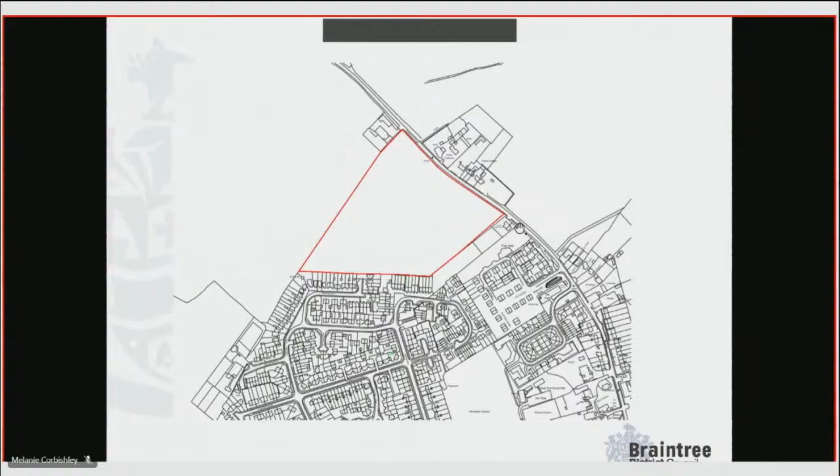The top end of the site, where you're driving out of the village. You can see in the background the properties and existing roads in Silver End, and then this is the edge of the site. You can just make out the Harris fencing, and this is the construction work that has started on site for the temporary access.

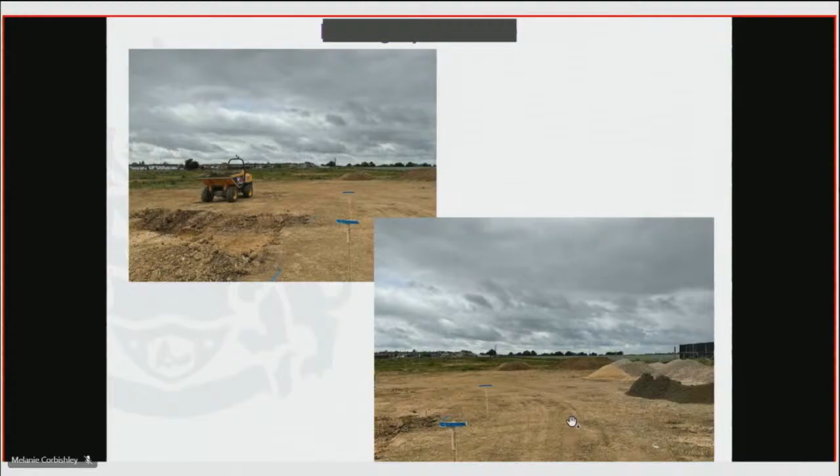Moving on to the layout. This is the layout that there's been some discussion over, as Mr. Spencer alluded to, both prior to the REM application coming in and since the application has been with us in December. We've got the Central Spine Road as the main road through the site, with a number of blocks of development, a mixture of house types, bedroom numbers and storey numbers. The allotments are placed here, and the play area is in the top corner, with SUDS basins either side of the main entrance, where it fronts onto Boars Tye Road.

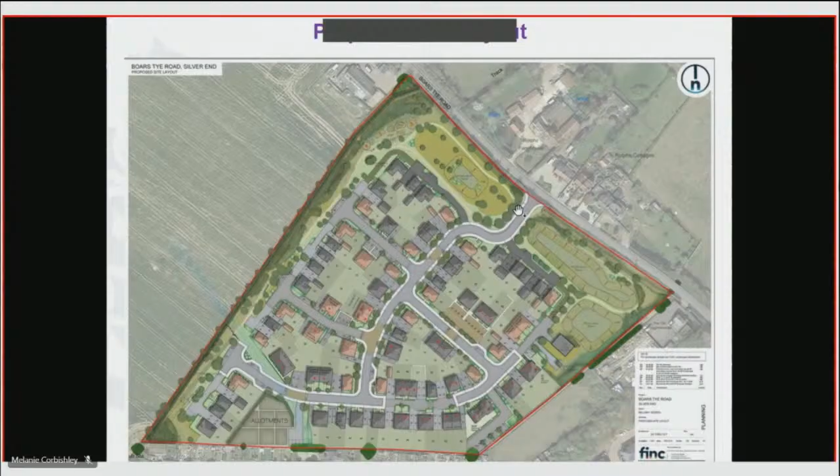This slide was just to remind members that the access for this proposal has already been approved when the appeal was allowed a few years ago. This shows you where the permanent access would be, serving all of the dwellings off of Boars Tye Road.

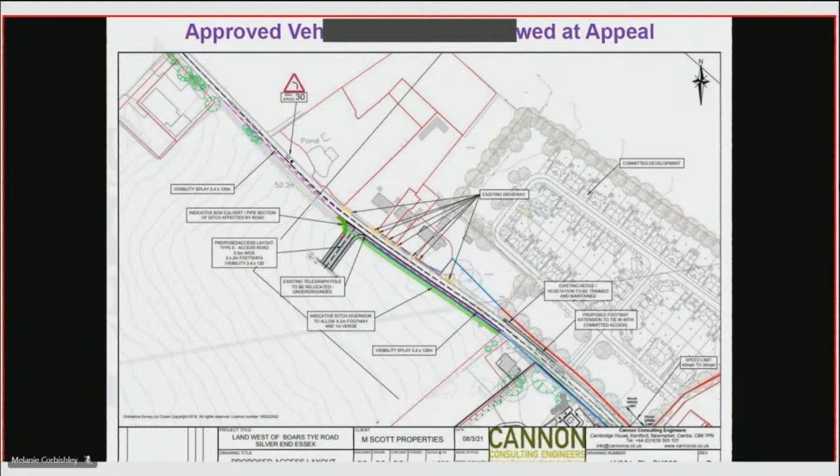The next few slides show visualisations of various street scenes within the site. These are plots 82 to 86, set behind some tree planting, with parking in front and properties behind.

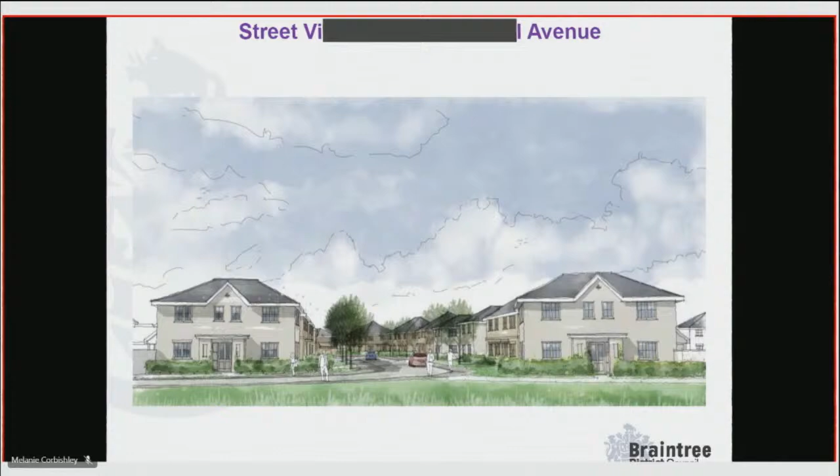We've then got a view of the top of the Central Avenue, which is where you would first turn into the site. This is what you would see from Boars Tye Road on the left-hand side if you were driving out of the village. We've also got a section showing the depth between the proposed properties, with front gardens, tree planting, pavements, road, then pavement, trees, front gardens and property again.

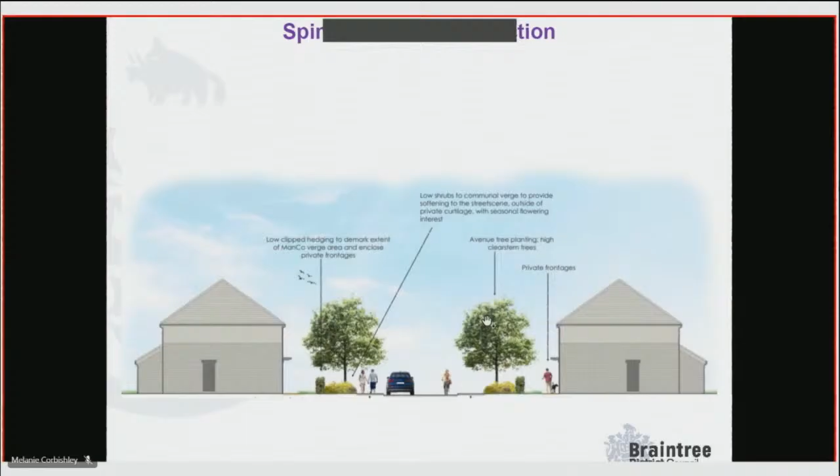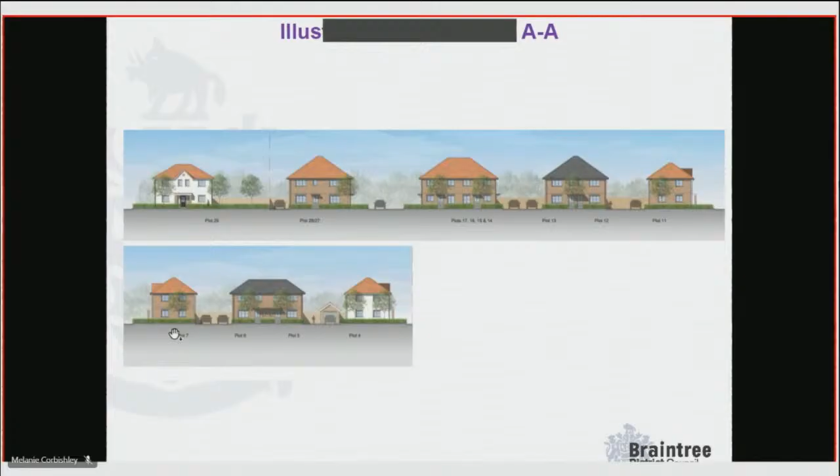The next few slides show illustrative street scenes, which are quite useful in putting the properties in context. This one starts at plot 29 and runs through to plot 11, with a smaller run from 7 back to 4, and then the part of the Spine Road coming in. You can see the street trees proposed, different materials proposed, but the continuity of that same hip roof design.

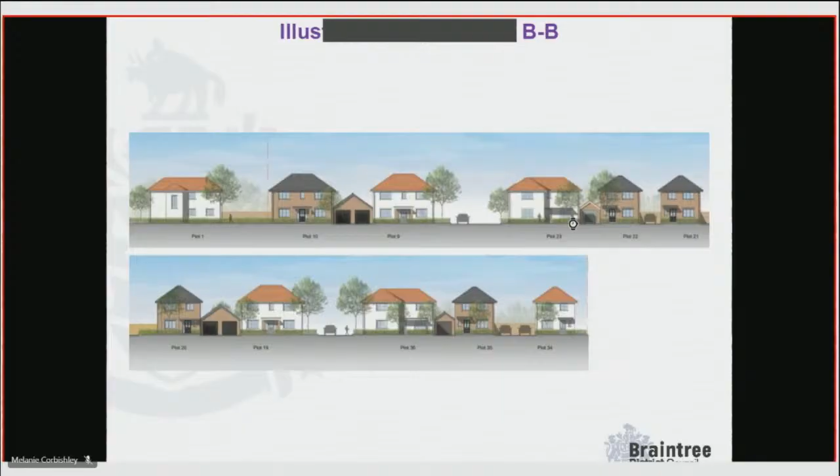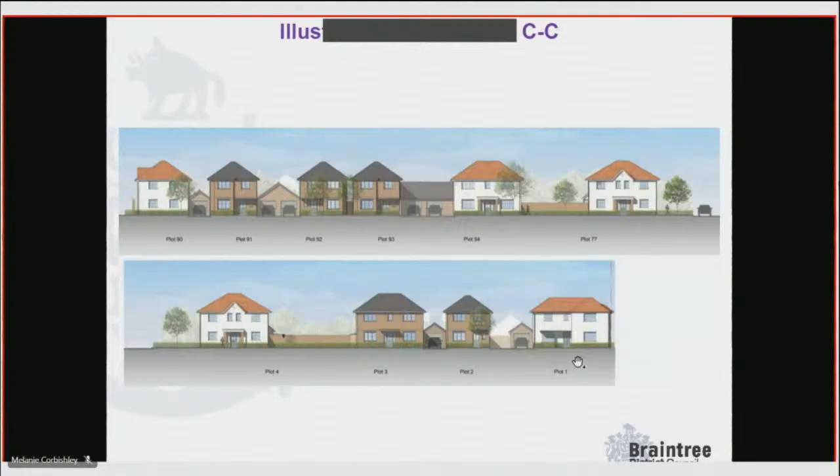The next few slides... I don't know why there's a bit missing in that one. It didn't look like that when I finished it. My apologies, Chairman, for that. I was going to ask that question.

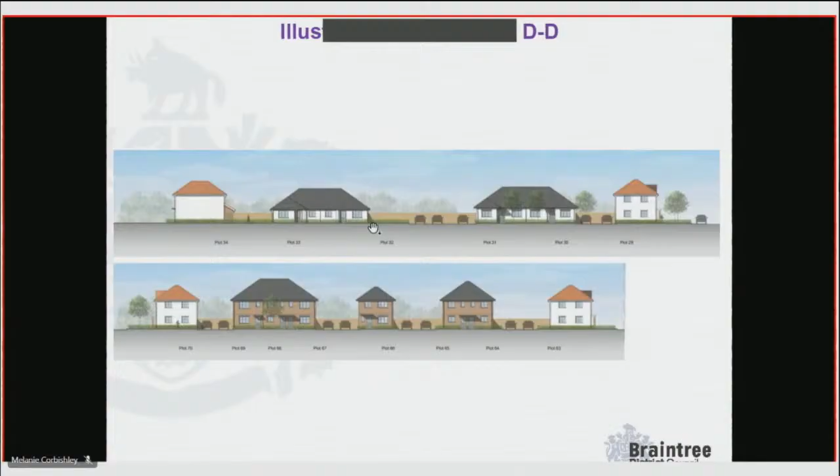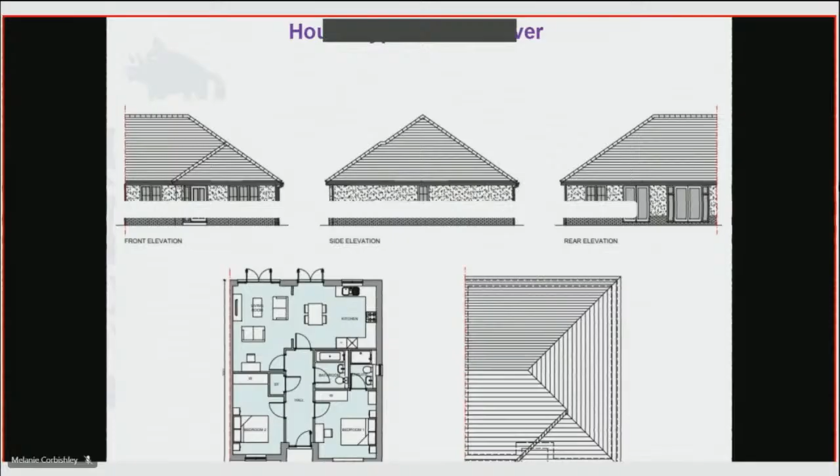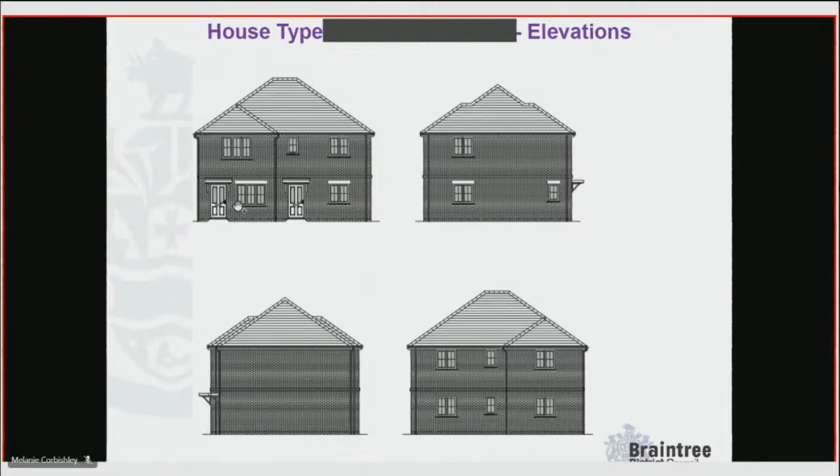The next property is the stationer and the bookbinder property, with floor plans and elevations. I haven't provided all of them, don't worry - you're not going to get all 94.

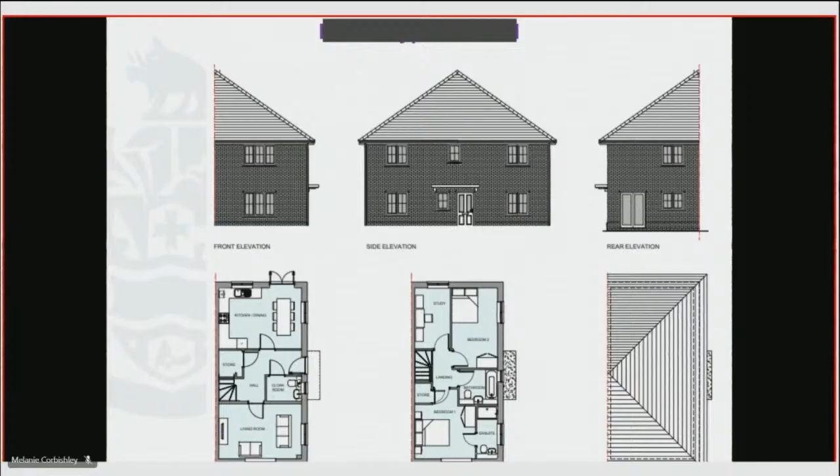The next house type is the Osler, which is a semi-detached property, with floor plans and elevations. And then we've got another semi-detached property, the Crittall, which has the entrance on the side rather than the front.

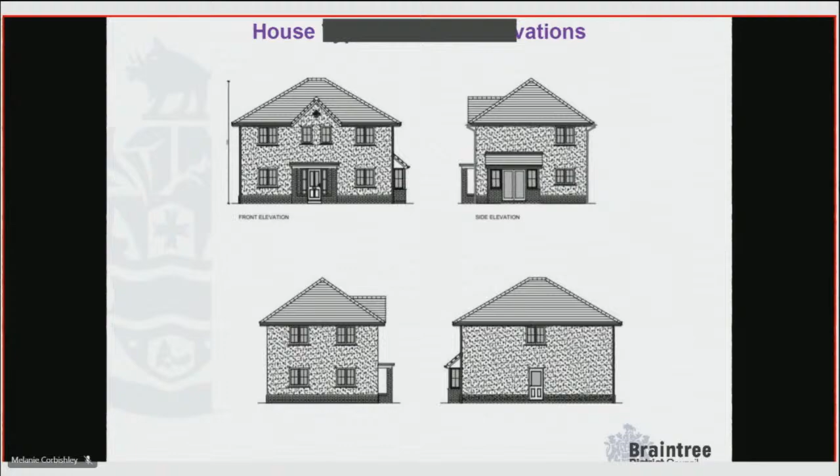This is the floor plans for a property called the Colker, which is a detached property, and then we've got the elevations. The last one I'm showing you is a corner turner property known as the Jeweller.

So that's the floor plans in an L shape, and then we've got the elevations there.

The next few slides show the proposed landscaping master plan for the site. You can see at the front of the site where it fronts onto Boars Tye Road, it's fairly open with the SUDS features either side of the main entrance. We've got the play area for children up at the top here, and there was a fair amount of discussion during the pre-application and application process about setting back development on this side here to create a softer new edge to Silver End.

And then we've got allotments at the bottom here, and you can also make out the proposed street trees throughout the site as well.

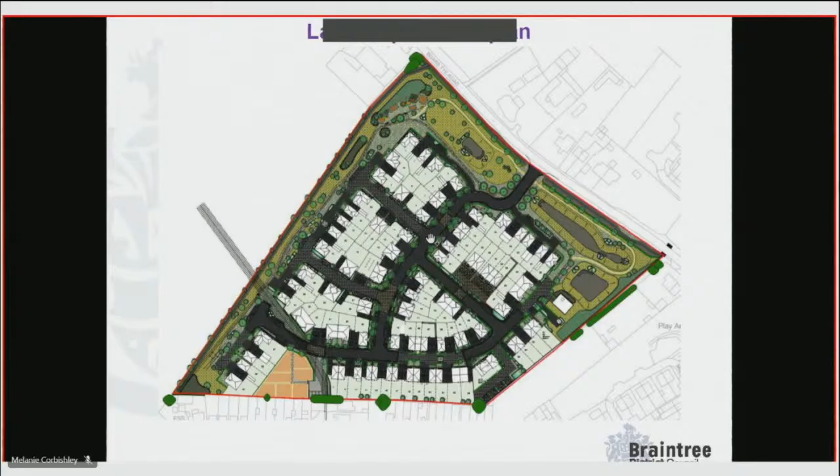This plan here just shows the amenity area. So this is land that is not going to be private back gardens, but is accessible for any of the residents within the site.

The next slide relates to 42 Broomfield, which is what the gentleman spoke to earlier, and I thought it would just be useful for members. It is detailed within the officer report, but this is a zoomed-in version of where number 42 sits and its side elevation, which is just where my cursor is at the moment, relating to the relationship with plots 42 and 43.

It was just to clarify to members that both of these gardens have depths of 15 metres, and there is a proposed 1.8 metre boundary fence that officers consider will provide eye-level privacy. I just thought it would be useful for providing some extra clarification on that, because we had a member of the public here raising that point.

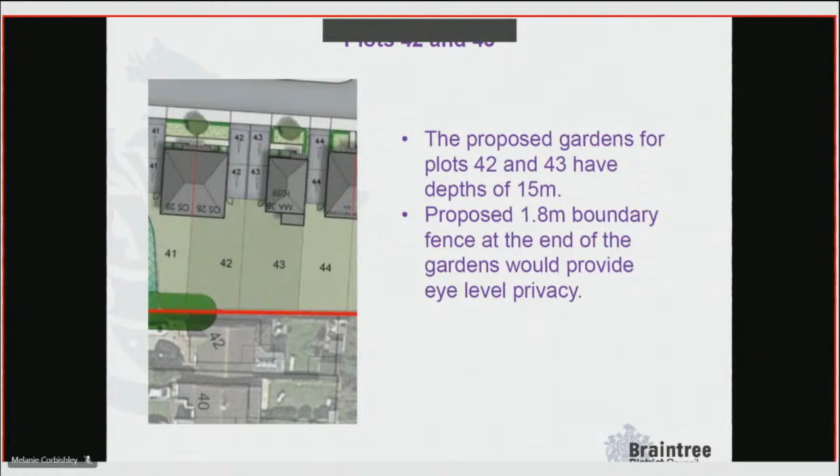Turning to the summary and conclusion, officers consider that the scheme is well designed and is high quality. Officers have critiqued and negotiated further improvements throughout the process, and the appearance, landscape, layout and scale are considered acceptable.

There are a couple of updates that I wanted just to provide you. In terms of the market housing mix, which is quoted in paragraph 11.1.13, there was a slight mix-up on the numbers. It should read 17 two-bed units, 30 three-bed units and 10 four-bed units, so the 3 and the 4 have slightly changed.

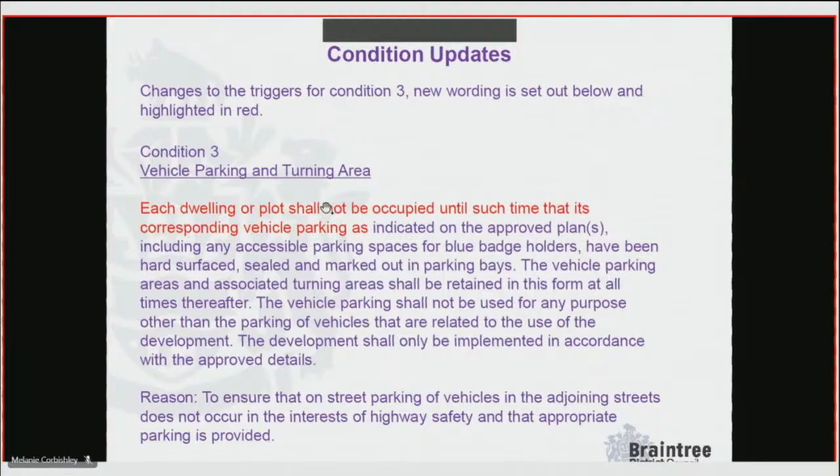Also got some condition updates. Condition 3 here, the trigger for the condition has been slightly amended. Rather than relating to the whole of the development, it's taking each plot or dwelling in turn, and the revised wording is there in red. It's the same thing for condition 5 in terms of the trigger - it would be per dwelling or plot rather than the whole development.

There's also a couple of amendments for the approved drawing list. Officers recommend that the Landscape and Ecology Management Plan, known as the LEMP, should be removed from the approved drawing list, as this is currently being considered under a separate discharge of condition application. There's a couple of drawings, the amenity areas plan and the swept path plan, where the drawing numbers were slightly incorrect, so they have been amended. The correct drawing numbers are shown there in red text.

Also, because we have a proposed condition about the noise impact assessment, one of the last conditions in the appendix, it was considered necessary to add the noise impact assessment to the list of approved drawings. So the recommendation is to approve the reserved matters subject to the conditions set out in Appendix 1, the updated conditions 3 and 5, and the updated approved plans as per this presentation. Happy to answer any questions.

Thank you, Mel, for taking us through that. Members, over to you. Councillor Diamond.

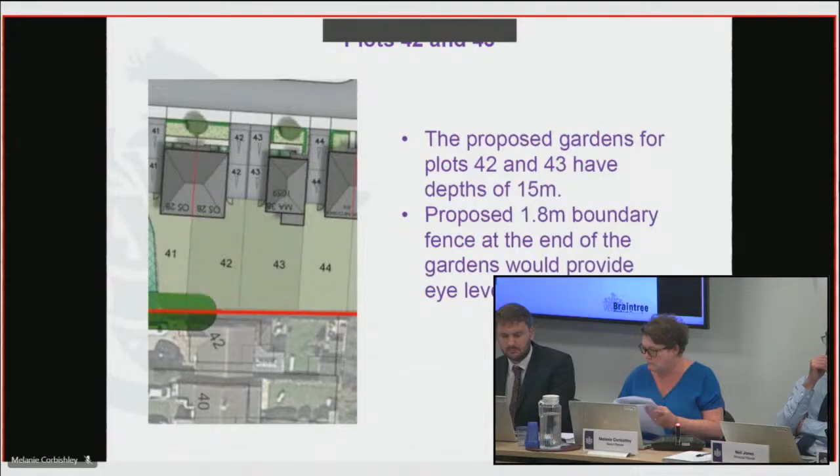The next question was to do with the speed limit. Just to put it in context, it is set out within the committee report. So as members are aware, the access that's been approved at the outline stage was based on the speed limit that's there at the moment on Boars Tye Road.

So the Highways Authority, when they made comments on that outline application, were satisfied that the access with that speed limit was sufficient, and they provided sufficient visibility splays in either direction. The appeal inspector agreed with that, and so that's the position that we're in.

At the forum, there was a discussion about moving the speed limit from the village side of the site to the non-village side. There have been some discussions on that, but as far as — I did check with Essex County Council today — there hasn't been any application to change the speed limit along there.

I did have an update. Have you got that email? Okay, because I can't get it on this one.

Sorry. Did have an update from the applicant's agent, who said there's the upgrading of the bus stops, and there's going to be permanent accesses to those bus stops along Boars Tye Road, which will change the character of that part of Boars Tye Road. And if ECC then want to progress any speed limit change, they're welcome to do that, but it doesn't sound at this stage that Bellway would be wanting to do that.

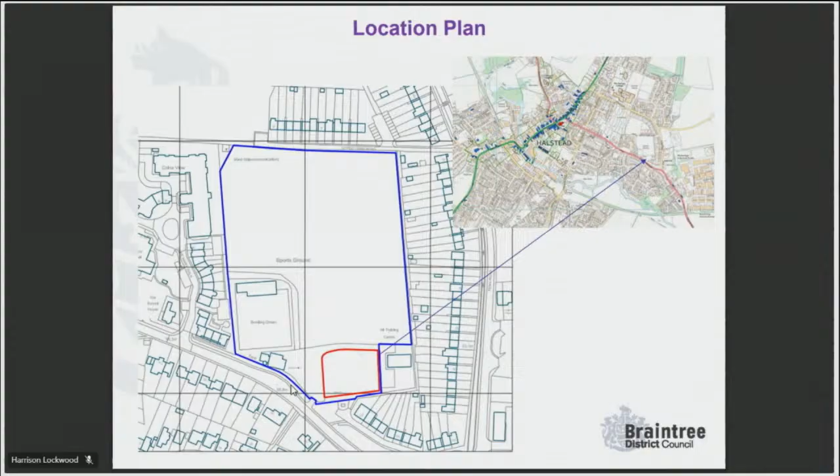This plot plan shows the site on a closer scale. You can see by virtue of the access to the air training cadets facility, this area of land is somewhat divorced from the main body of the playing field to the north.

You can also see the closest neighbouring residents are along Colchester Road to the south, with those on Fen Road to the east buffered by the air training cadet facility. There's a public footpath link between Colchester Road and Fen Road that runs along the south of the site and diverts southwards to Colchester Road.

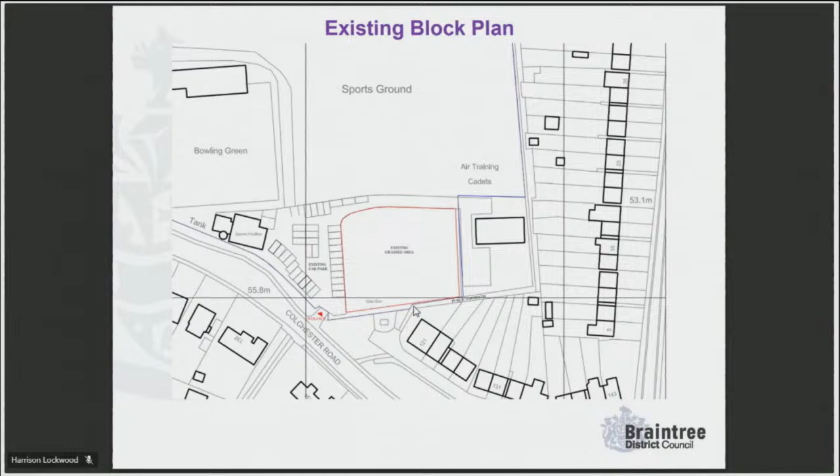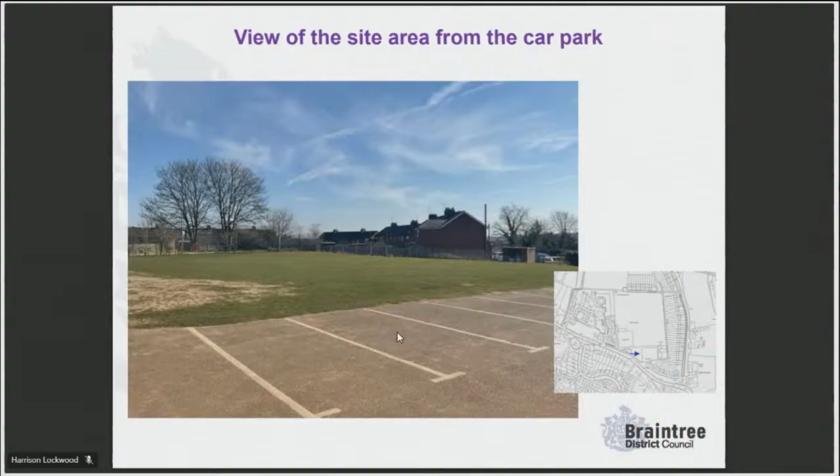Turning to the site images, this image shows the site as a whole from the adjacent car park, and you can make out the neighbouring residences on Colchester Road to the right, and the air training cadet facility fenced off to the left.

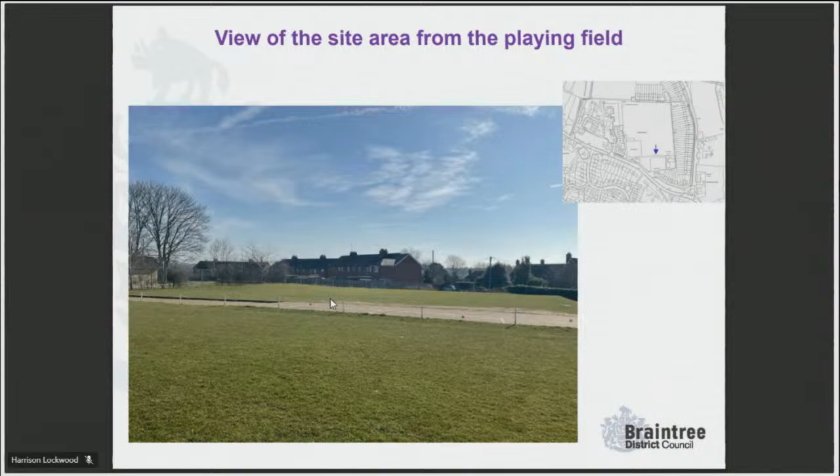This image attempts to demonstrate the proximity of the site to that neighbour and also the nature of that footpath link and the fencing.

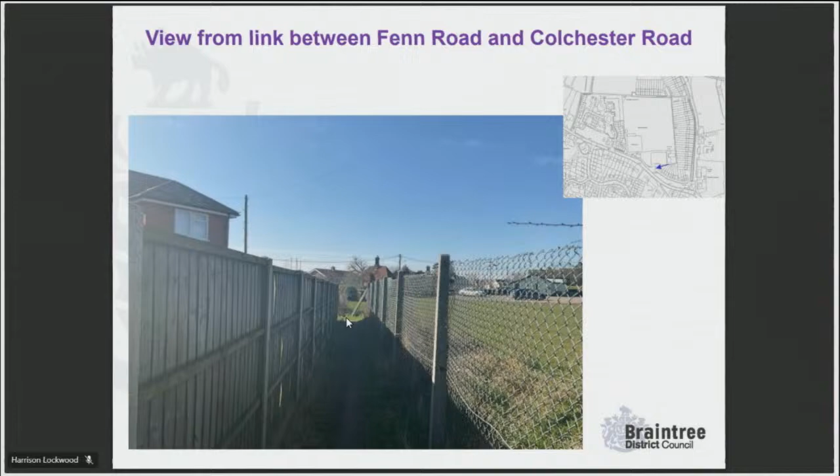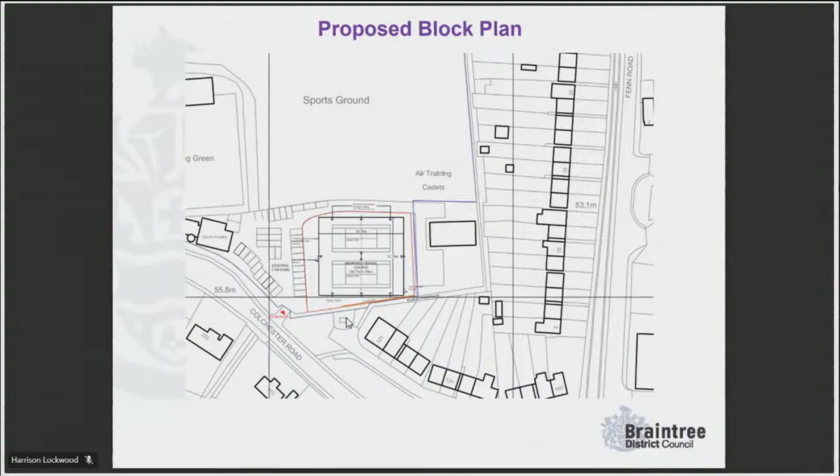This is another plan which shows the court layout and dimensions in some more context. On this plan you can more clearly identify the position of an acoustic fence to the south, which was added to the proposal following an initial round of consultation.

The position of the fence would extend for 30 metres along that southern boundary and has been chosen to mitigate noise impacts against this neighbour.

It would be positioned near to the existing wire mesh fence separating the footpath, as viewed on the final site image.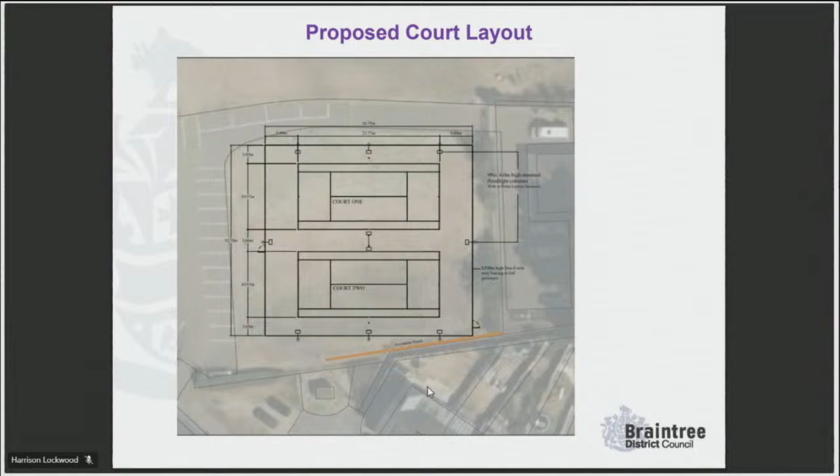The fence would extend to 2 metres in height and would only be partially visible above the neighbouring rear boundaries due to the existing close boarded fences that exist there.

Environmental Health have regarded this fence as providing a good level of noise protection for these properties, and it's also acknowledged that general noise levels are anticipated to be vastly reduced compared to the existing football and rugby pitches, where at points you might have up to 30 players with coaches and spectators. In comparison, it's unlikely that people using these courts would exceed 8, for 2 doubles matches ongoing.

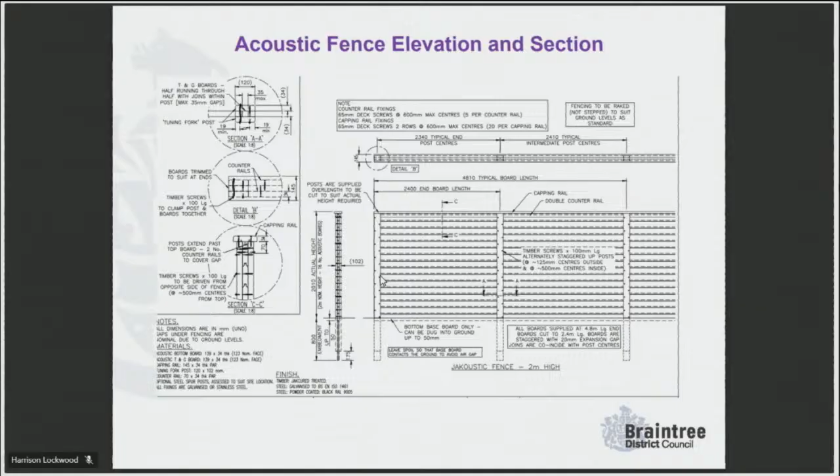The elevational plan shows the position and the height of the columns and fencing, as well as the posts between the wire mesh.

The arrangement of floodlit columns forms a primarily side-lit scheme, with 3 along the southern and northern sides, and then 1 to each end and a central column. This arrangement is noted within the LTA guidance as being good for the control of glare and spillage, as well as allowing for lower column heights compared to a corner-lit scheme.

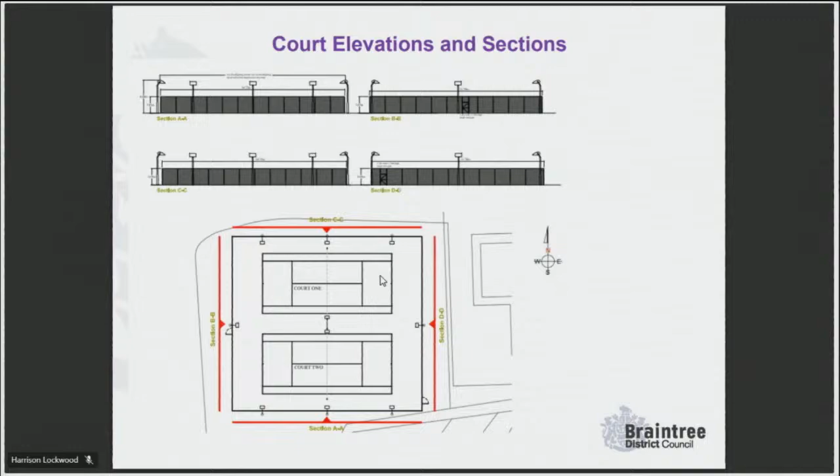In terms of floodlight overspill, the scheme has been designed sensitively to minimise this, given its proximity in particular to this southern neighbour. The primary impact will be on this dwelling, but the position of the site should be noted within a suburban area, and a condition is imposed on the use of the floodlights beyond 9 p.m.

The lux levels would only reach 1 at the rear boundary, as you can see on this plan to the right, which is below the maximum values within suburban zones within the Institution of Lighting Professionals' standards and BDC's adopted artificial lighting SPD.

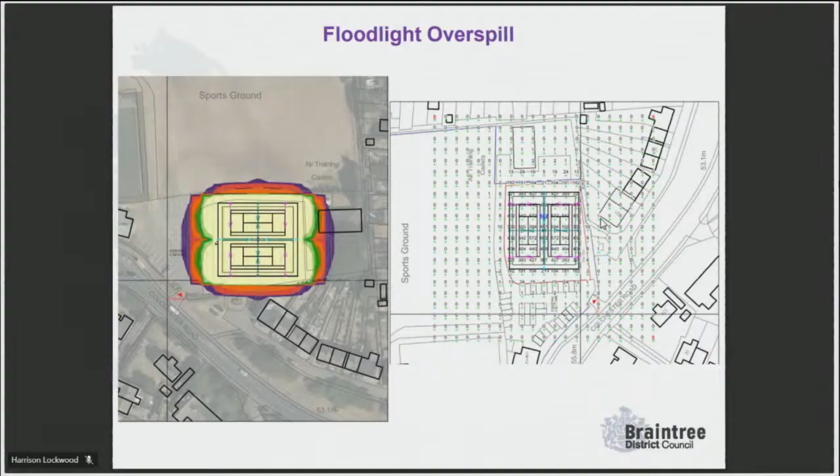Turning to the key considerations and consultations, no objections have been raised by consultees. There were 2 neighbouring comments received prior to the addition of the acoustic fence, and following 2 further rounds of consultation, no further comments have been received. The lighting and noise impacts have both been considered acceptable from Environmental Health, though conditions are in place to safeguard this, and ECC Highways have raised no objection, noting existing parking capacity and that the site is within a fairly sustainable location where other modes of transport are also available.

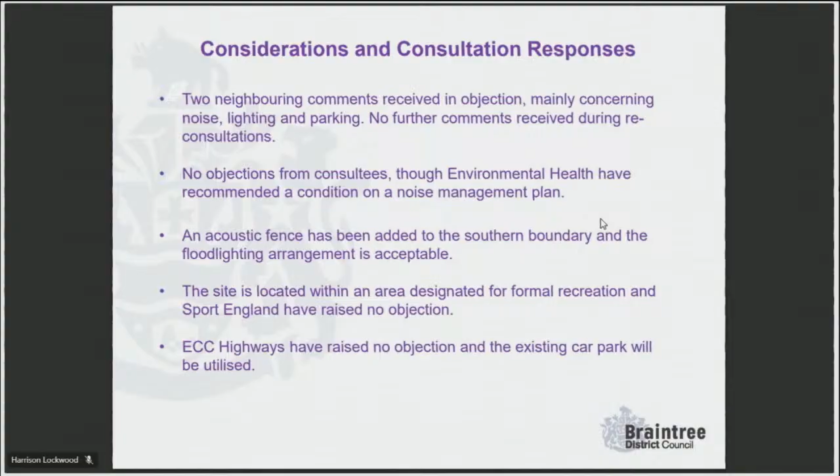By way of a member update, there are a couple of further conditions proposed. The first relates to the provision of the acoustic fence being in place prior to the first use of the site. The second relates to details of the community use of the facility, including pricing strategy, hours, management and review procedures. The third relates to the details of the tilt level below the horizontal for the floodlights located to either side at the centre of the court.

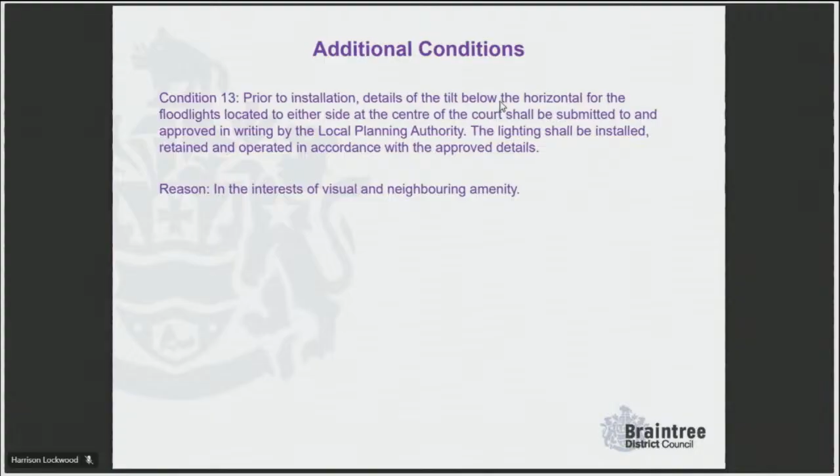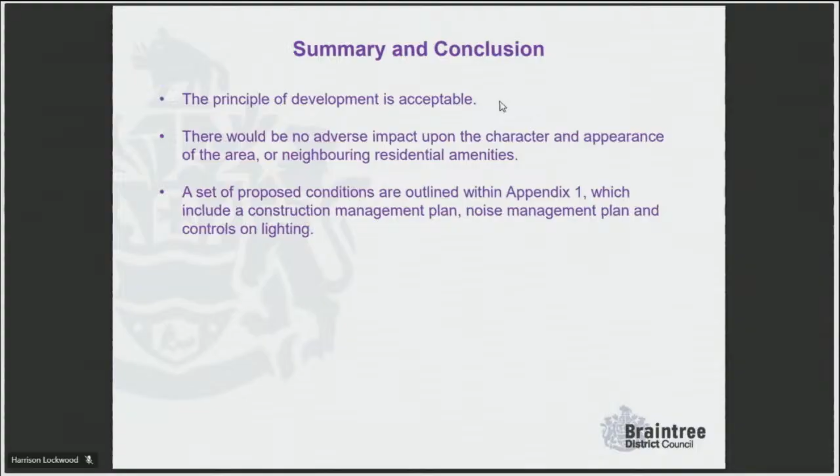In summary, the principle of development is considered acceptable, and there will be no adverse impact upon neighbouring amenities or local character as a result of the proposal. Therefore, officers recommend that the application is granted subject to the conditions set out within Appendix 1 and the additional conditions. Apologies, that last slide should also refer to condition 13 as well.

Thank you, Harrison.

Members, Councillor Abbott. Could you put back up the slide, please, on the tilt level, what it said, the wording, on the condition? Should that be at the horizontal rather than below? The horizontal tilt level's like that, so if you go below it, I don't know how they get there.

Just to clarify the reasoning for that: within the lighting assessment document, we've essentially got the tilt levels for 3 separate types of luminaires proposed. We've got the 2 tilt levels for 2 of them, and they are 30 degrees below the horizontal, and the other one is 23 degrees below the horizontal, but we don't have the tilt level for the other luminaire. So that condition was added quite late on just to safeguard and ensure that the tilt wouldn't be above the horizontal, essentially.

You mean below the vertical? It doesn't make sense, because horizontal is 0 degrees, vertical's like 90 degrees. I'm just wondering, looking at the Lux drawings, there was quite a significant overspill - your drawings of what the lights look like, they're like almost like crayon drawings, but they look like the lights were horizontal. But looking at those overspill drawings, you've got quite a significant overspill, particularly at the ends of the courts, which suggests to me they're not horizontally tilted. So, sorry, but I'm just a bit confused about what it's trying to do.

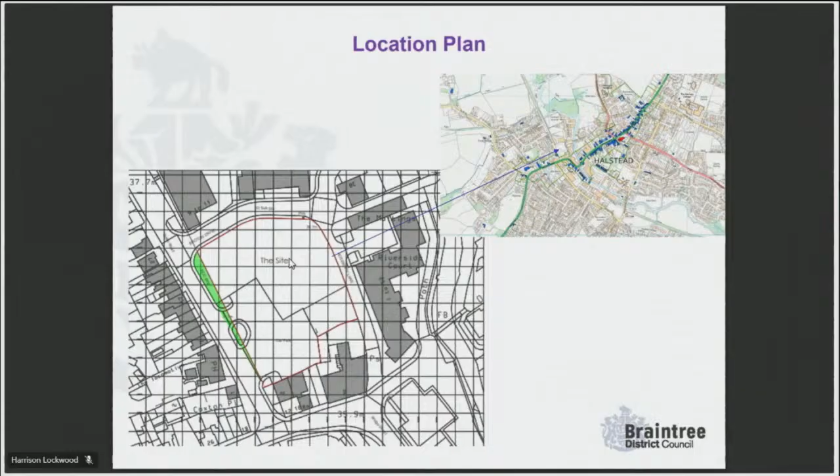As this is primarily a technical engineering operation, I thought it would be useful to firstly set out the scope of the proposed works. The remediation works include the removal of grossly impacted soils and derelict infrastructure from the site, dewatering of contaminated pockets of groundwater, segregation or treatment of waste, the provision of clean cover in soft landscaped areas, and further monitoring and upgrading where necessary.

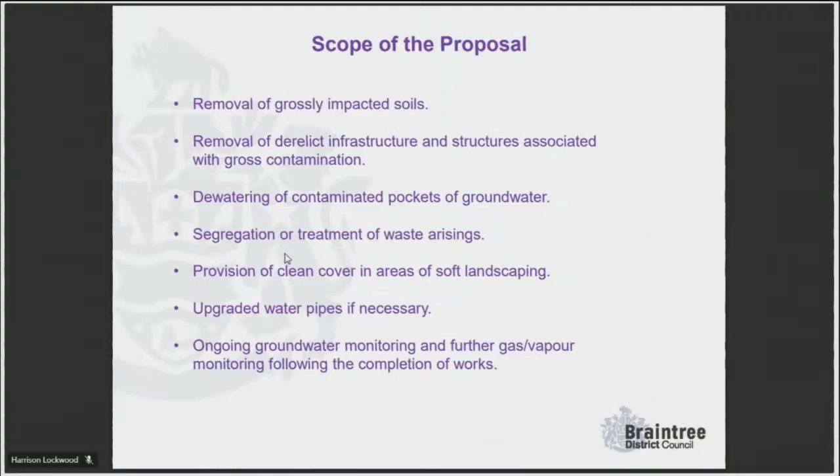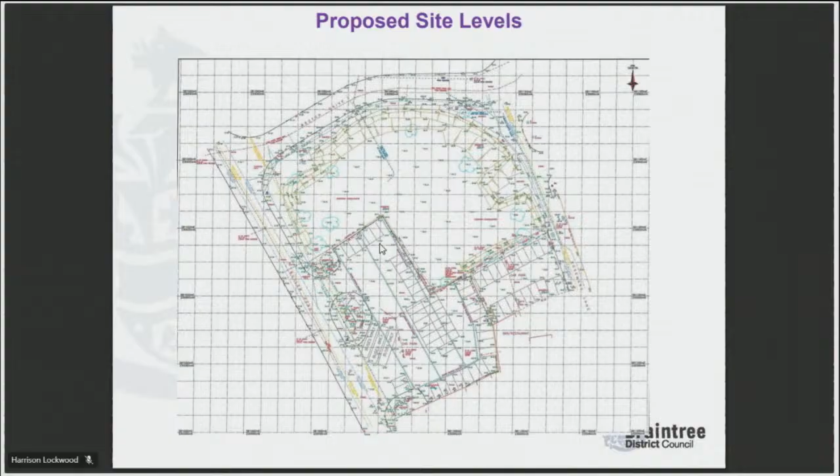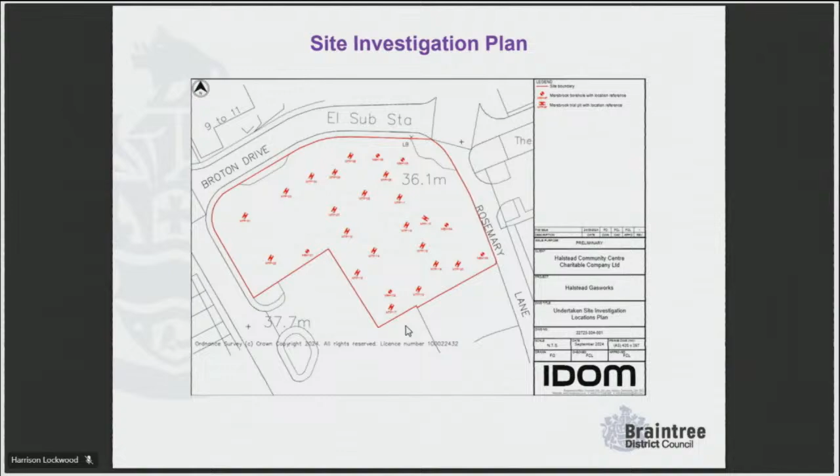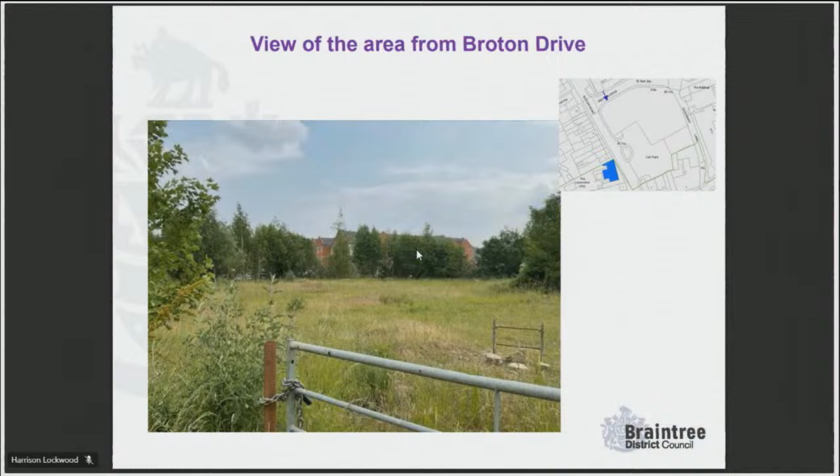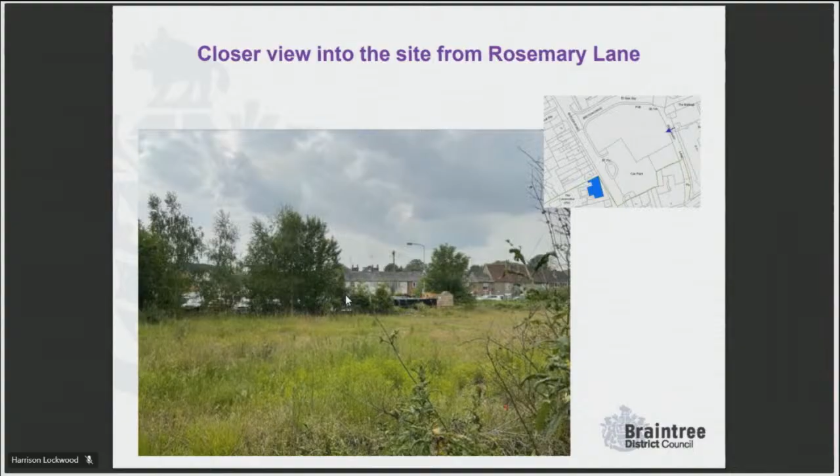No trees are proposed for removal. However, it's unclear if there would be an impact upon the root protection areas, as the full extent of contamination cannot be known until further investigative works have taken place. With this in mind, a tree survey and protection plan has been required by condition, which should ensure their appropriate protection and that the land is adequately reinstated.

Given the nature of the works, the planning assessment is quite limited, as there's no change of use or character to the land and it's to be reinstated as it is now. A sufficient understanding of the existing contaminants and risks has been provided. However, the Environment Agency have requested conditions on further investigative works, monitoring and then verification.

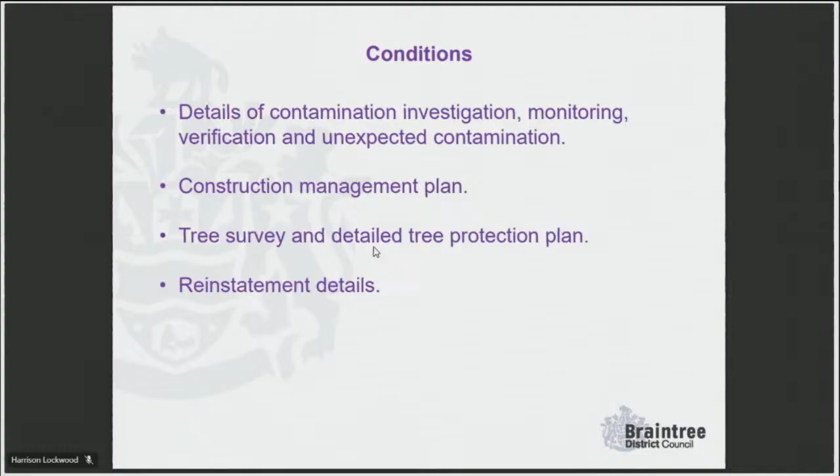A construction management plan has also been requested from Highways to ensure that there would be no adverse impacts upon the local transport network. But as stated, the car park would remain fully operational. Details of the trees and reinstatement works have already been touched upon in the presentation.

To summarise, the application is acceptable in principle, as there would be no change of use or building proposed, just remediation works to the land. Subject to the conditions set out in Appendix 1, there are also no objections from statutory consultees, and officers therefore recommend that the application is granted subject to these.

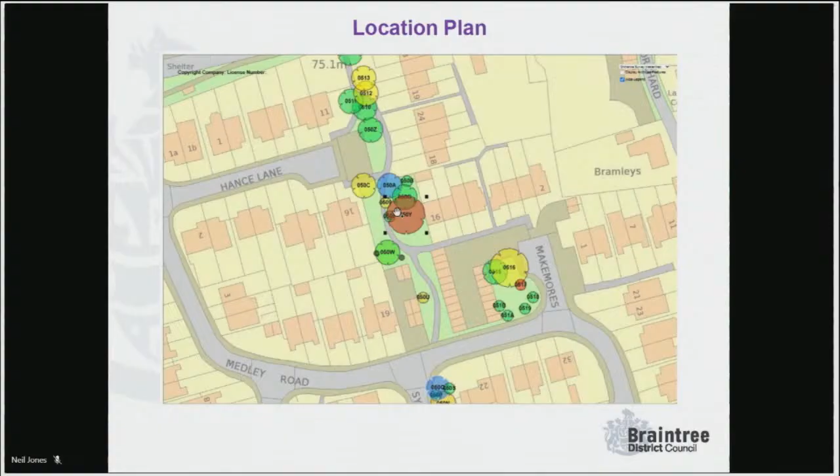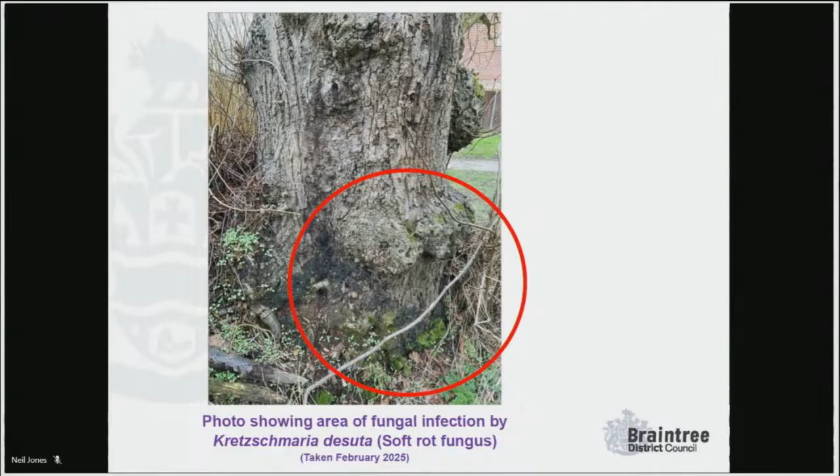So whilst on the face of it, and superficially at this time of year, it looks like a healthy tree, the epicormic shoots are sort of hiding what's going on at the base. And I guess that also does make it more difficult to monitor going forward. Not impossible, but it's another factor to consider.

In terms of representations, as usual, the application was publicised by way of site notice. No representations were received from members of the public or a response from Rayne Parish Council. So as I said, it's a lime tree, which is quite a tall specimen, prominent within the area.

What's happened is the council's tree officers are carrying out routine inspections of the council's tree stock across the district. So when this tree was inspected, they noticed the fungi infection, and their concern is that this fungus can cause soft rot in the roots and in the butt of the tree.